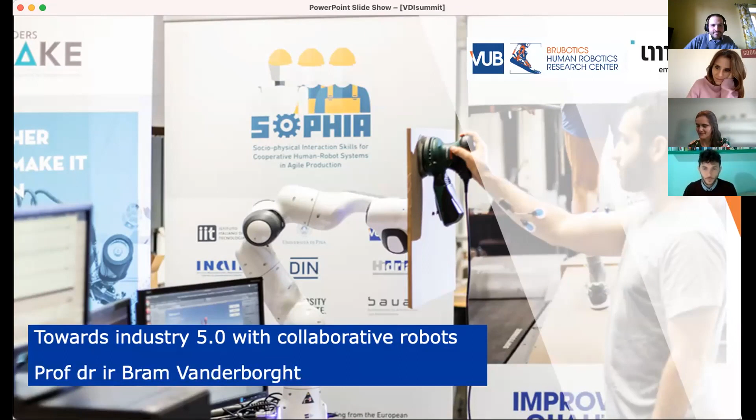So I will talk about towards Industry 5.0 with collaborative robots. The classical robots are used for the 3D jobs: dirty, dangerous, and difficult and dull. But some say that it will be also becoming a 4D story, where demographics becomes an important player.

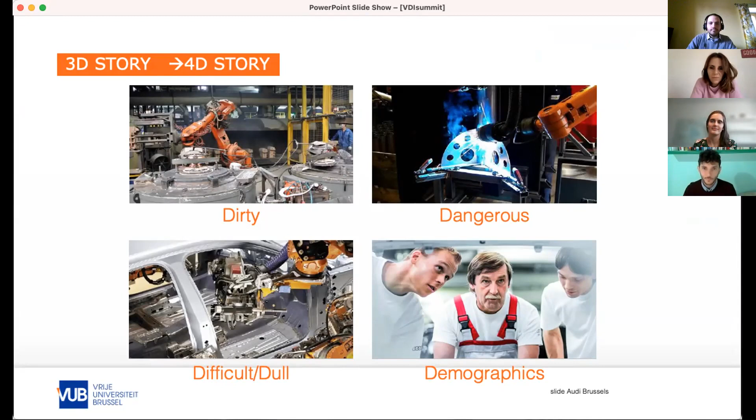We see that the average age is increasing. We need to work longer. And this is the case in Japan, but also China, due to their one-child policy, but also in other regions like Europe, this has become a serious problem.

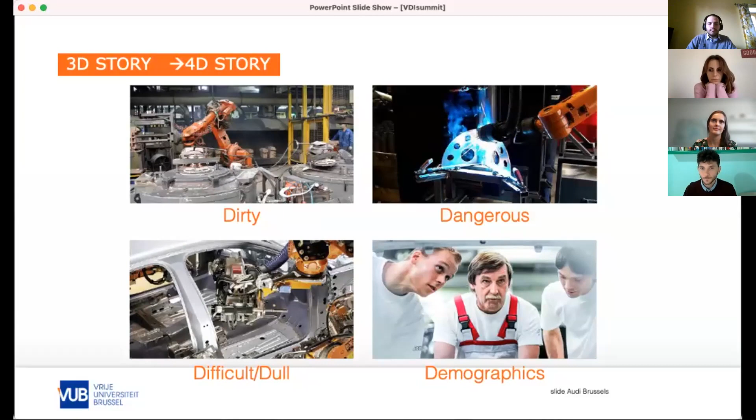Moreover, the complexity of manufacturing is increasing a lot, and typically robots are taught to manufacture cars, which is certainly a large part, but it's also not the complete story. You have a wide range of series, and as a customer, a wide range of possibilities. So every car is almost becoming unique.

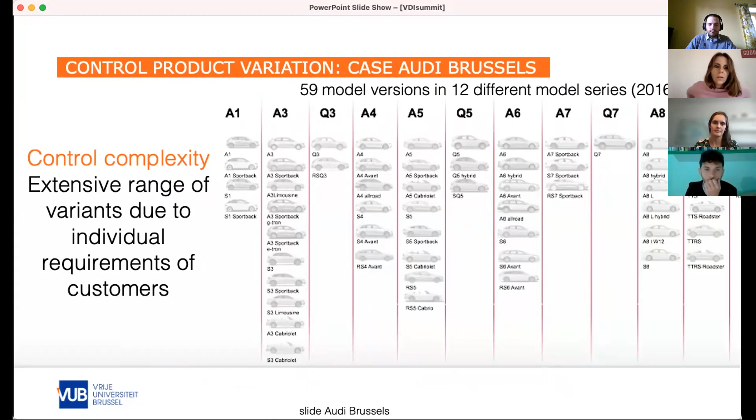In the beginning, when you have the body shop, you don't have a lot of variation. You have 3 doors, 5 doors, the paint also too dangerous. So there is a very high level of automatization, but in the end assembly, where all the different variations become flexible parts, we see that the level of variation increases, but the automatization dramatically decreases.

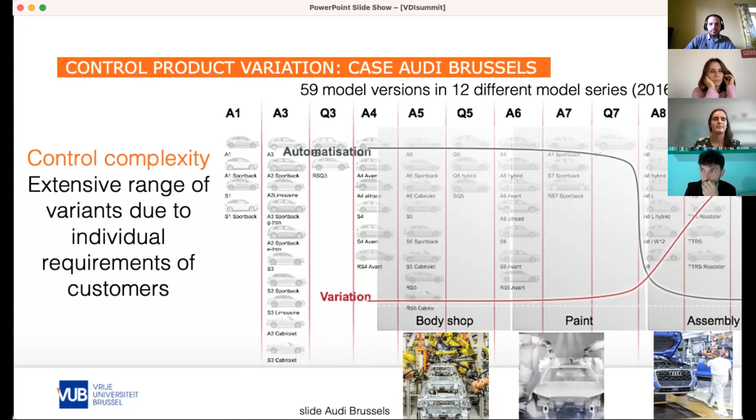For example, in Audi Brussels, at the moment when they were producing the A1, there were 5 robots active in the end assembly. All the other jobs were done by humans who have the cognitive load, but also have to work with their hands above their head, bend over in the car, which causes musculoskeletal disorders. Elon Musk also expressed that they wanted to make it too automated and that humans are underrated.

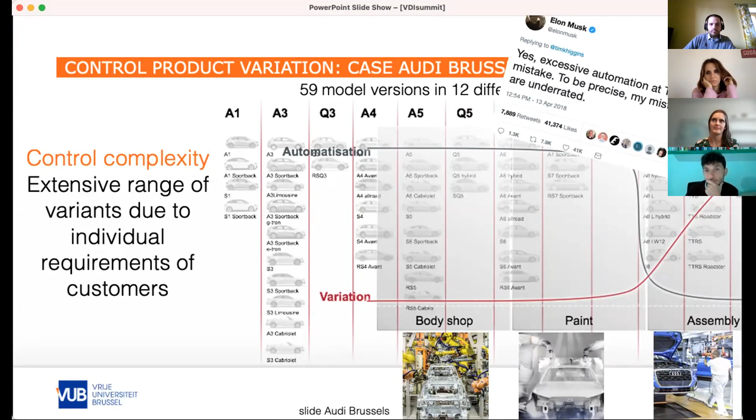But all this work in non-ergonomic conditions has a huge impact on the body with lower back pains and other pains, but it also has a huge economical impact. For example, in Belgium, it costs €1,000 a day for one person being absent. So if you have a few percentage of absenteeism on your work floor, that has a huge impact on the productivity of the plant as well.

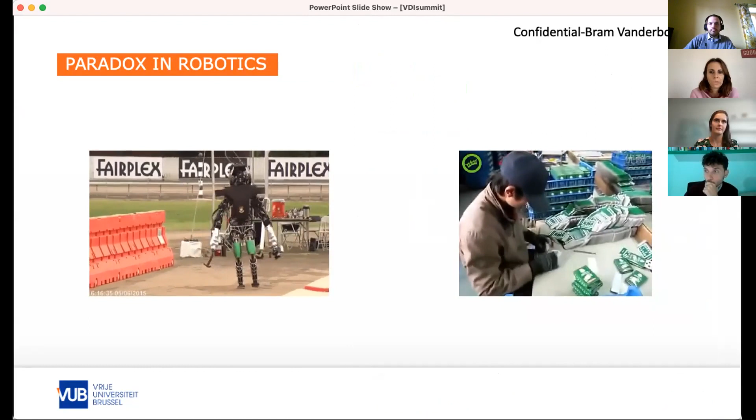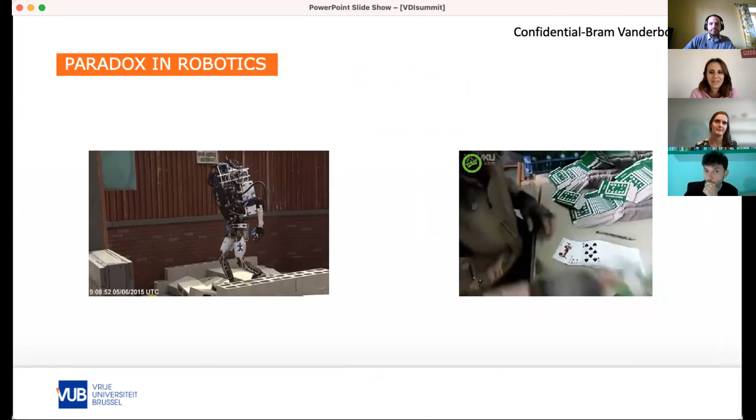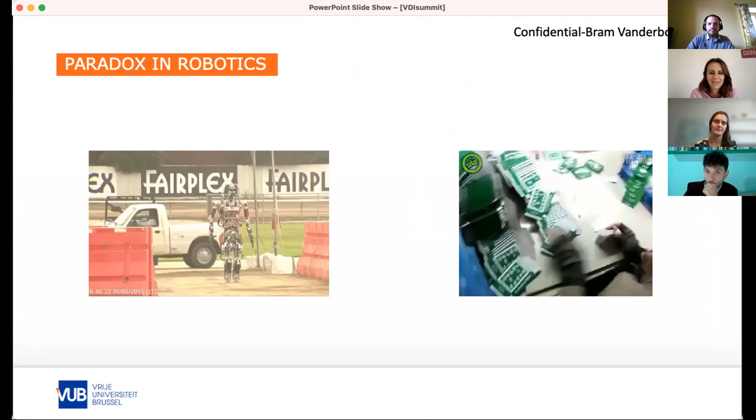So why then not use robots? But there is that famous paradox in robotics: often what is very challenging for robots is easy for humans, but also often what is challenging for humans, like working very precisely, doing always the same job without becoming tired, is rather easy for robots.

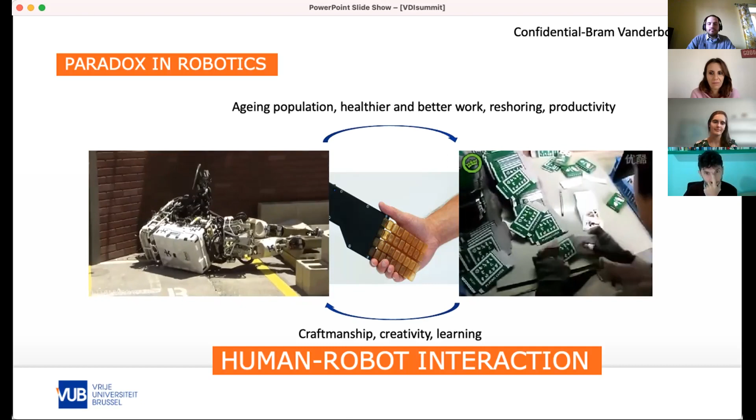That's why we focus a lot in our lab on human-robot interaction, to exploit the complementary strengths between humans and robots. And also, the human is for us still a huge source of inspiration to build better robots.

And so Industry 5.0 - in the past, objects were built for the elite at a very high price. And due to the several levels of industrial revolutions, we could produce mass products. For example, the famous Model T of Ford could be gotten in all colors as long as they were black.

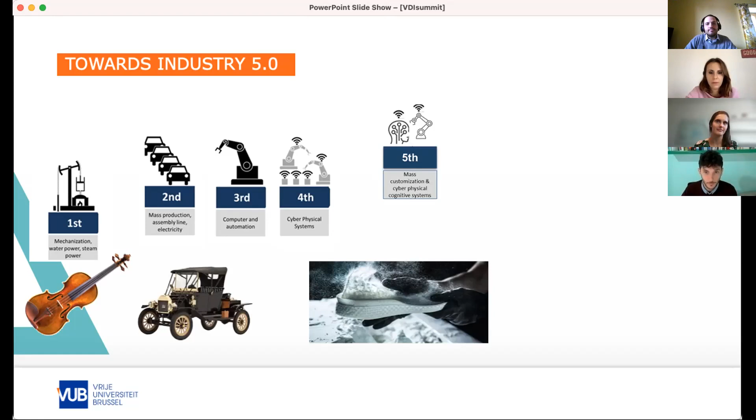But the idea of the fifth wave is to have mass customization. I, for example, run in the forest in the morning, someone else runs at lunch in the city center. We all have different feet. So how can we produce a shoe which is individualized for a certain person? That we cannot do with mass production, we need to do it locally, and to make it at the cost of mass production, but with the uniqueness of mass customization.

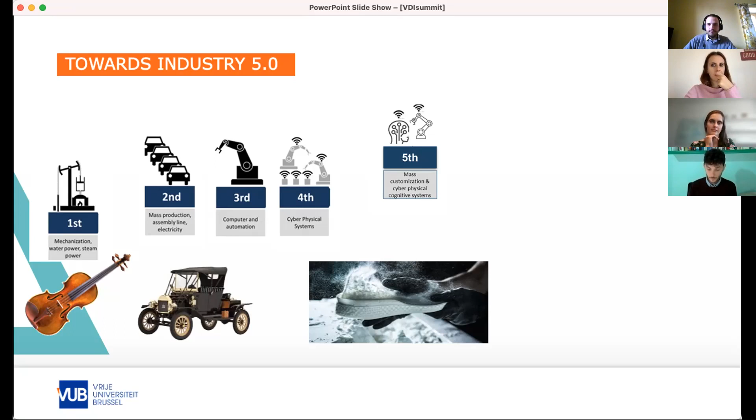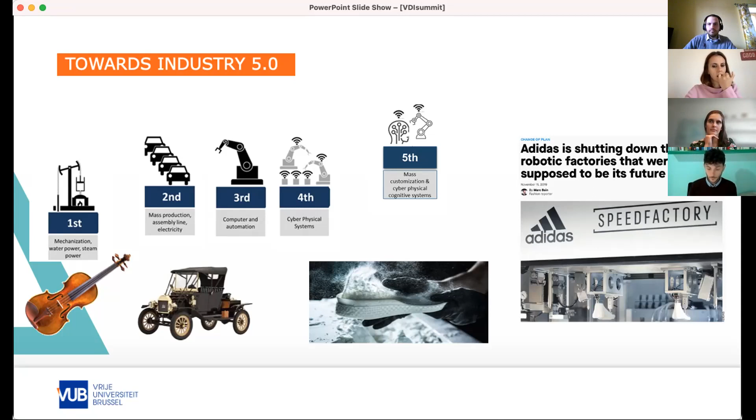So we need new technologies like robots or others like 3D printing in order to realize this vision. For example, Adidas developed its first factory outside China back in Germany, the mother country, but they also had to close it again, probably because the technology was not ready.

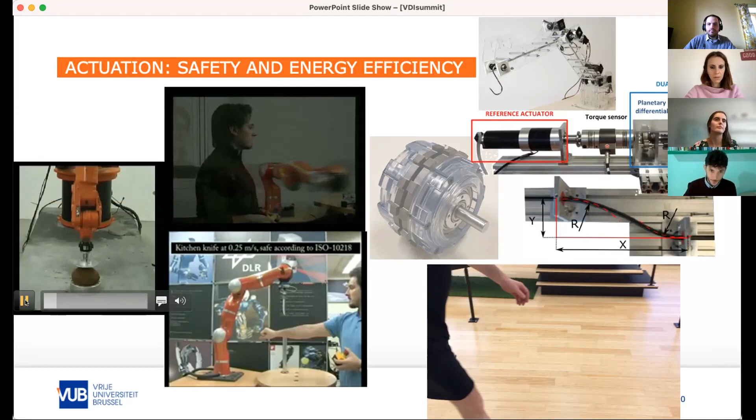As mentioned in the introduction, safety is of course the primary concern if we want robots to be working together with humans. Here you see the classical industrial robots crushing a coconut, a video from DLR, because it's too unsafe, and that's also the reason why those robots are kept in cages far away from humans.

So 15 years ago, I think, we started innovating this with a lot of projects like VIACTORS and others, developing robots that are not position controlled, but torque controlled, and which have the possibility to interact safely with humans.

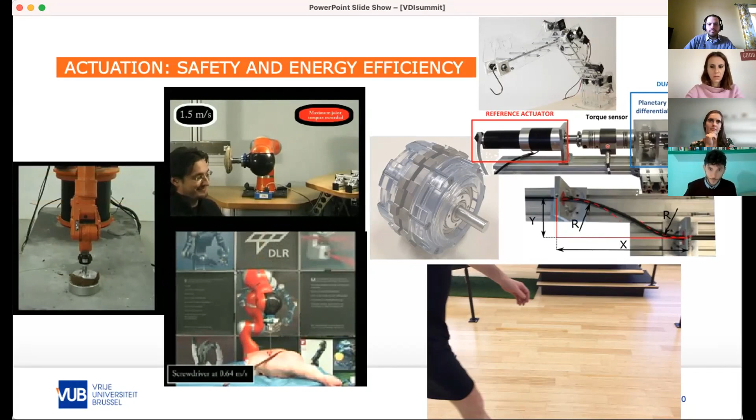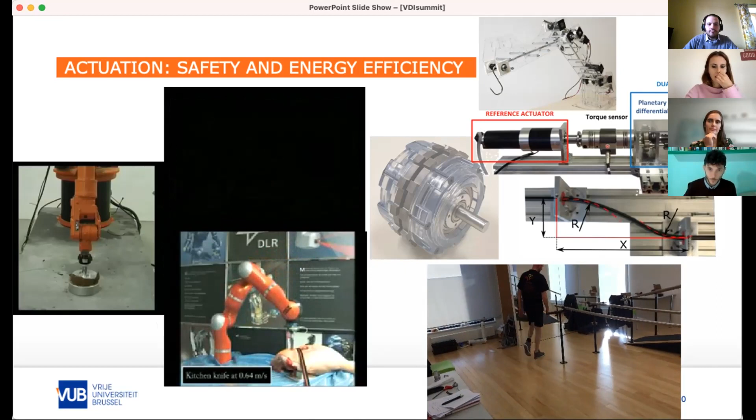In our lab we focused a lot on having compliance not by active torque control, but by incorporating elastic elements in the parts, so it's not only safe but also energy efficient. For example, we developed this for our prosthetic feet, which is now a spin-off company, Axiles Bionics. We introduced springs in parallel and in series, and we're further investigating how to make robot designs safer, lighter, and more energy efficient so they can also be mounted on ground vehicles.

For example, we introduced, as part of the work of Kelly, flexible limbs, so we don't design robots based on stiffness anymore, but on strength. This let us reduce the mass, which also improves safety.

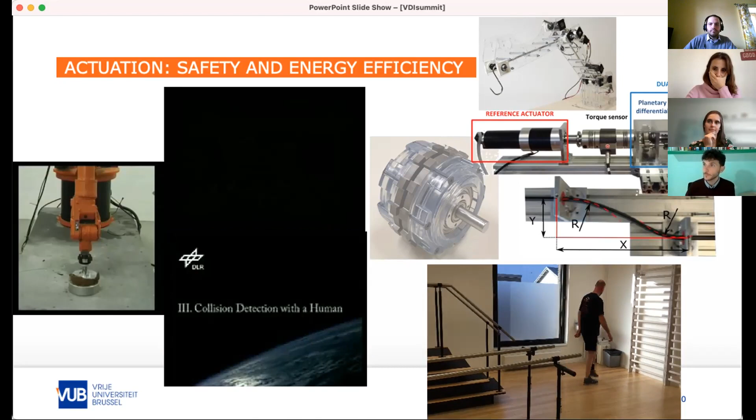We're innovating on new gearboxes, which is patented technology. We also want to spin off a company there to make gearboxes much more energy efficient, because we see a lot of energy is lost there.

We are investigating remote actuation, so the distal joints of the arms and of the exoskeletons are lighter and more energy efficient. We're also finding ways to add more motors so the overall system can become more energy efficient, a bit inspired by hybrid cars with a combustion engine and electric engine, but here we want the overall system to be more energy efficient.

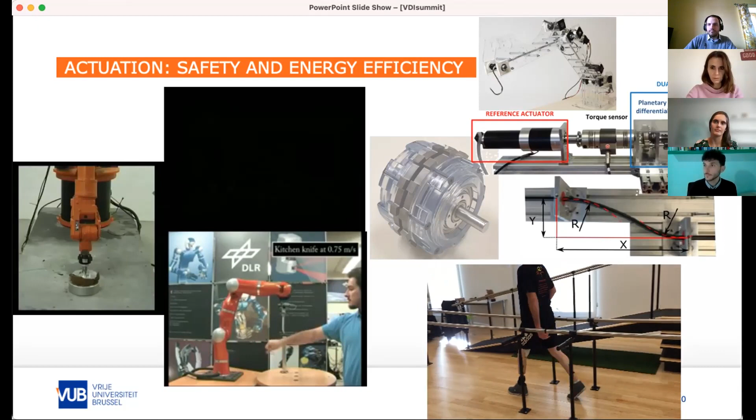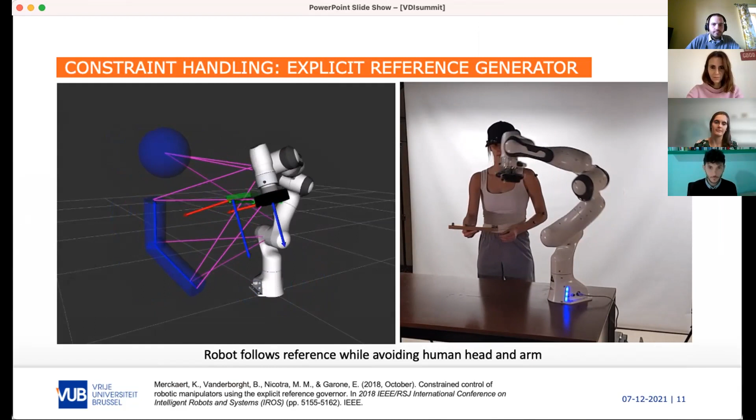So this is how to make hardware for improved human-robot collaboration. But of course we want to avoid robots hitting persons, and this is very nice work of Kelly, where we want to avoid a robot hitting a person while taking all the constraints into account.

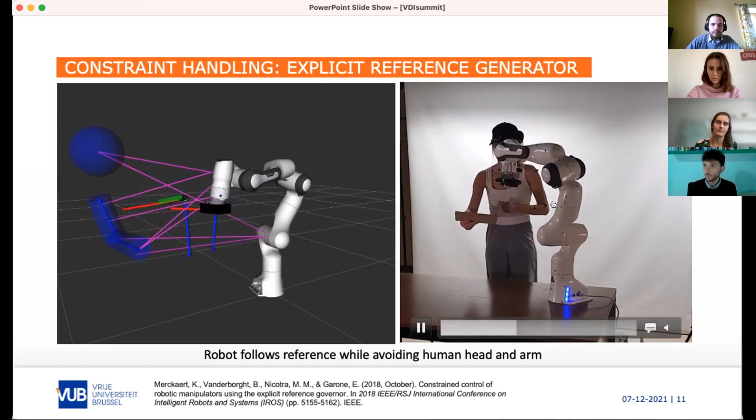Typically model predictive control is used there, but she developed, together with co-workers from Boulder University, an explicit reference governor which can be calculated in real time. Here you see she placed extra mass on the robot to push it toward the torque limits, but the constraints of torque and speed are still satisfied.

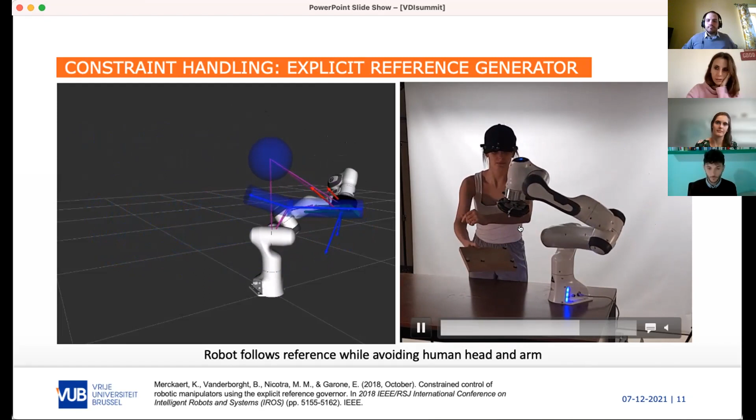She made the robot try to follow this plate at 30 centimeters on top, to show that it's real time. At the moment she's wearing a motion capture system to determine where she is compared to the robot, but of course this isn't practical in a real scenario. That's why she's now also using cameras, but that has limitations too.

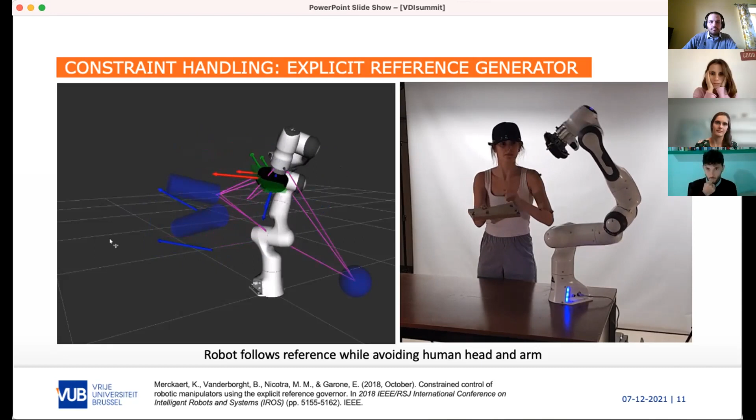That's why I recently also joined IMEC, a big research institute in Belgium on microelectronics, where we want to develop a new generation of sensors and skins for robots, so we don't need these external systems anymore but can embed sensing on the robot to detect obstacles. This sensing can be combined with the control that Kelly developed.

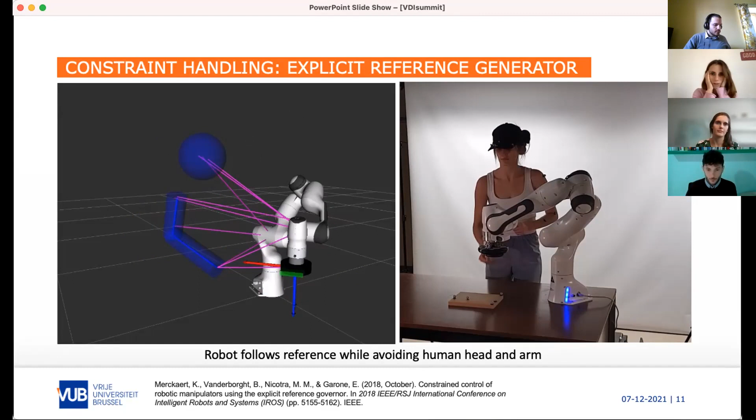At a certain moment, several years ago, Audi Brussels, at that time building the Audi A1, approached us. They saw the development of the cobots and wanted to test them on the manufacturing floor. But when we entered the floor, we saw that people got afraid of a new wave of robotization.

Our story was that we want to reduce your cognitive and physical load, we want robots that help you. That's why we very quickly brought sociologists into the project, to help us figure out how to build and program robots so they're accepted by the workers.

One of the features is that we started experimenting with gestures, so the worker can use gestures. In order for the robot to respond, there was also a face, but we have copyright issues with the artist who designed it, so I'm not allowed to show it anymore.

While people were very afraid of this new technology at the start, now they're really proud to work with the robot. It allowed a new wave of different cobots in the factory for very different applications. Now they're building the Audi e-tron electric vehicle. This was the only robot at first, but they later had 500 robots that got nicknames, showing it was really accepted by the workers. It was a whole new type of robot introduced there.

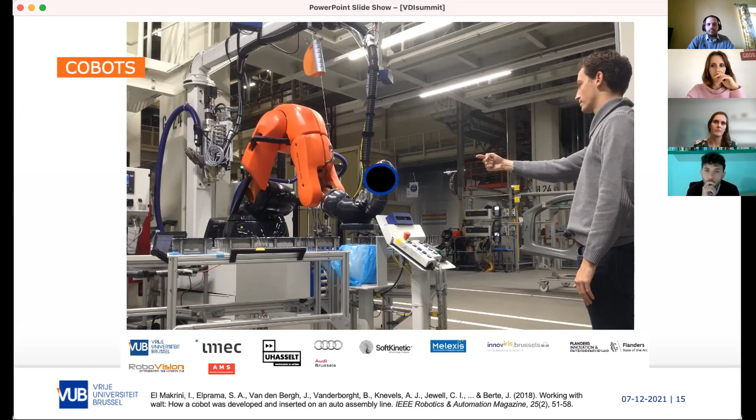This was the only robot allowed at that moment by the Metal and Wood Union in Germany, which Audi Brussels took over their rules. But we continued to work where we saw how humans and robots can work together.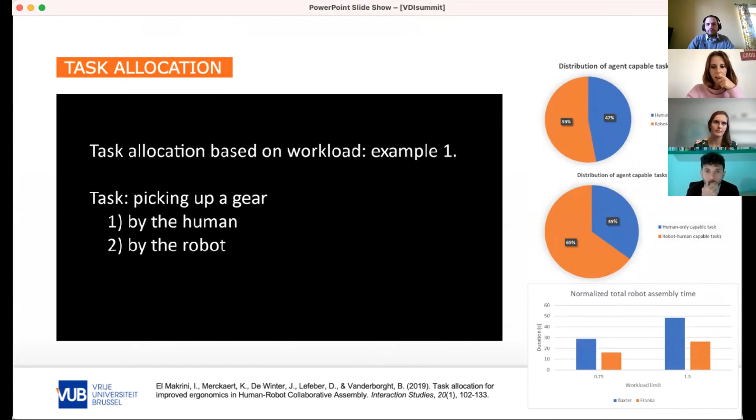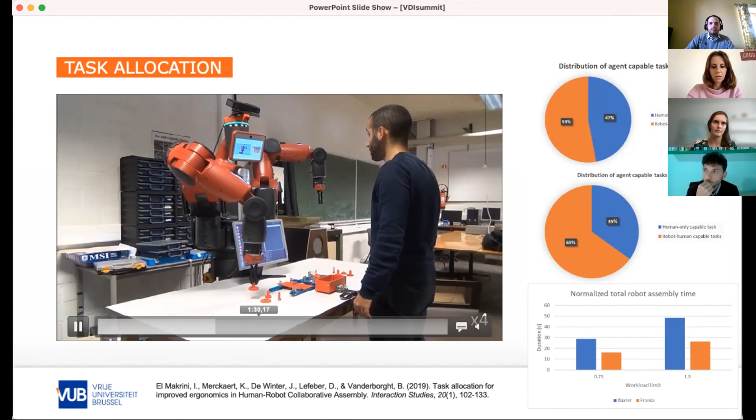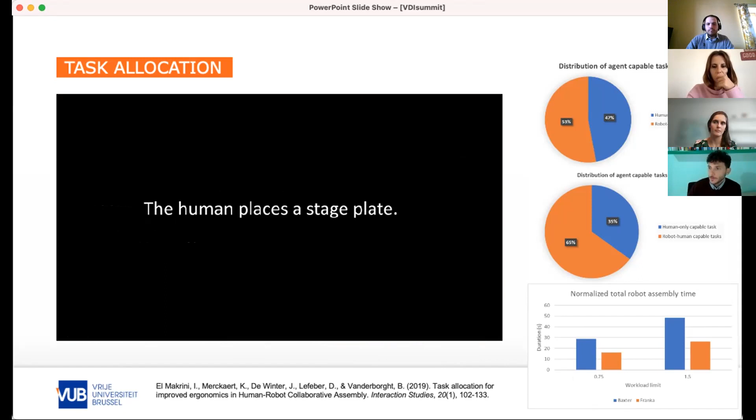This is, for example, task allocation, where we distribute tasks between a human and a robot, both having different capabilities, also the human having issues with ergonomics. So you see that we track the ergonomics of the worker and we distribute the work over the human and the robot. If we take another robot like Franka, who is much more precise but only has one arm, you see the system automatically adapts a new task allocation scheme in order to optimize the work.

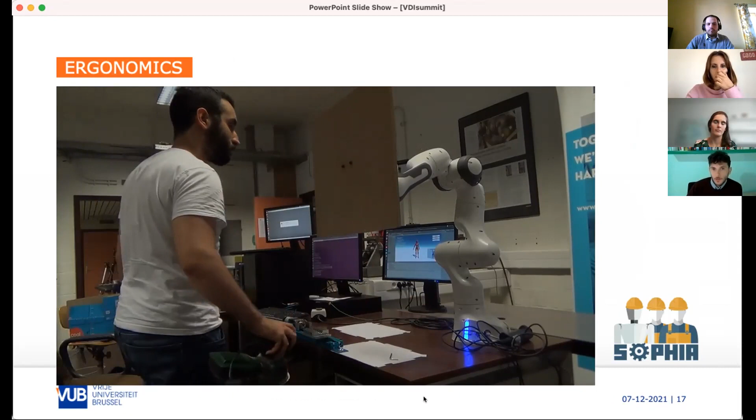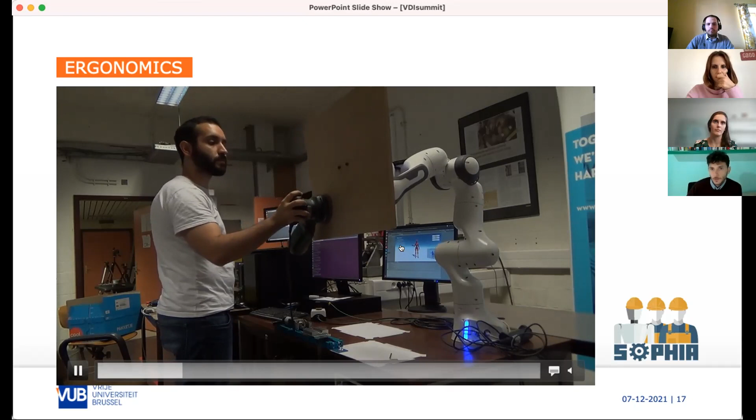Now we're also in a European project called Sophia, where also the idea is to improve ergonomics. And also here with the Kinect camera, we track the posture of the worker. If the worker goes to non-ergonomical postures, the screen becomes red and the robot adapts its behavior so that the human can always work in a more ergonomical place.

Apart from always collaborating with cobots, we also want to very intuitively program the robot new behaviors. I think Sylvain will go much more in depth there. The reason is that we want to go to much smaller batch sizes in manufacturing, but then it becomes very expensive to program the robot. And then it's better to still use humans for it.

So big companies like Audi Brussels can afford it, but what with small and medium-sized companies who don't have the programmers in-house to always reprogram, especially for small batch sizes. The problem is, of course, we have in this case a lot of models, the CAD models and so on, but not of how the assembly sequence should go.

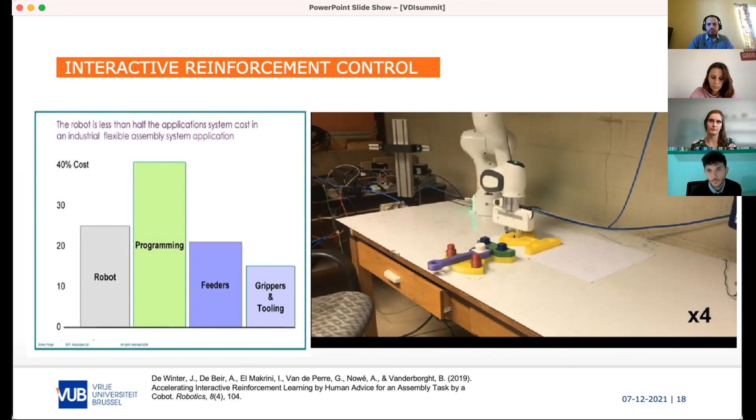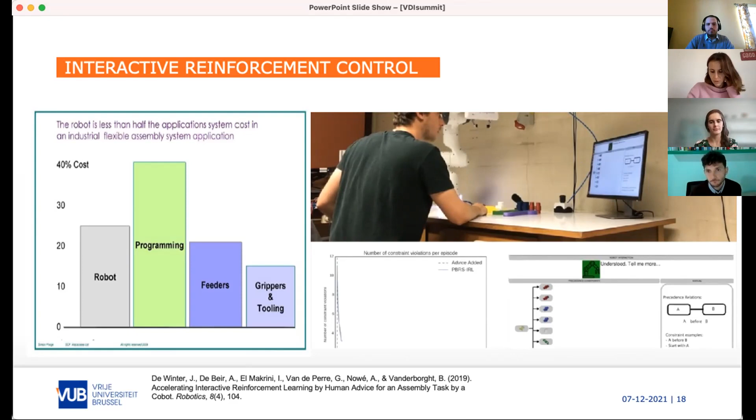Leaving that all to the robot, for example here we use reinforcement learning, needs so many iterations that it's not very practical to implement, especially for small batch sizes. That's why Joris is investigating how we can use interactive reinforcement learning, like a teacher-student relationship, to guide the robot to do the assembly sequence, so the robot learns in a much faster time.

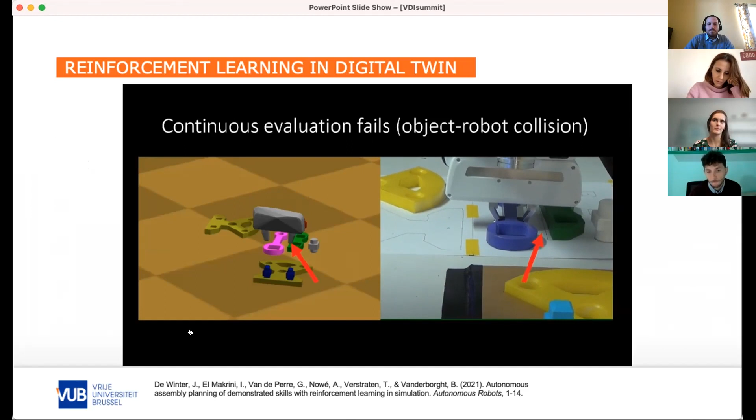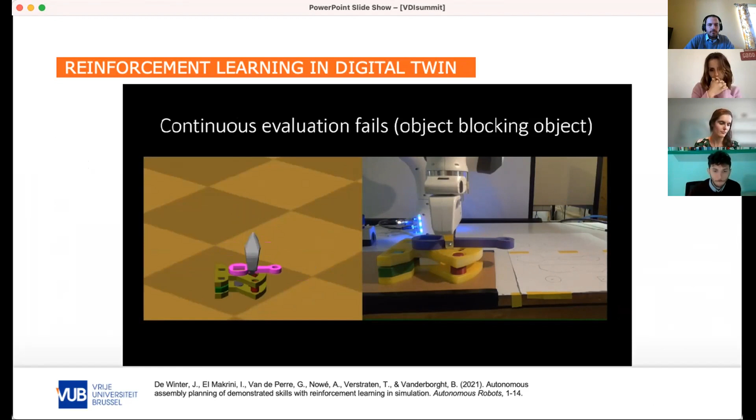Another approach Joris explores is to train in a digital twin, which is now a very fancy word for using simulators. One of the challenges is, of course, in an assembly sequence the physics become important. For example, here you see it's touching it, but also placing parts around it. That's why he had to use engines which included all the physics in order to have a realistic training of the device.

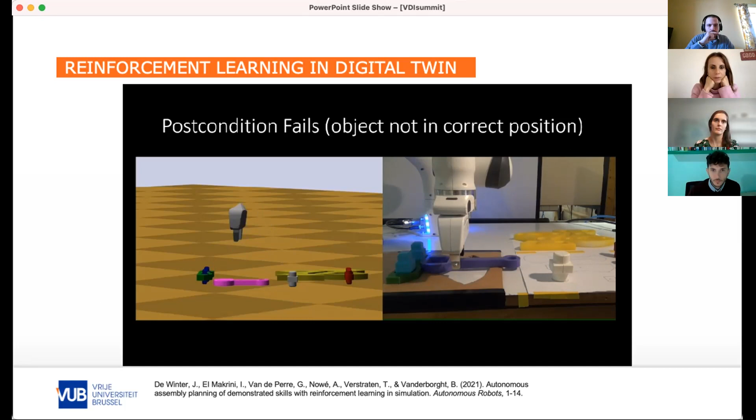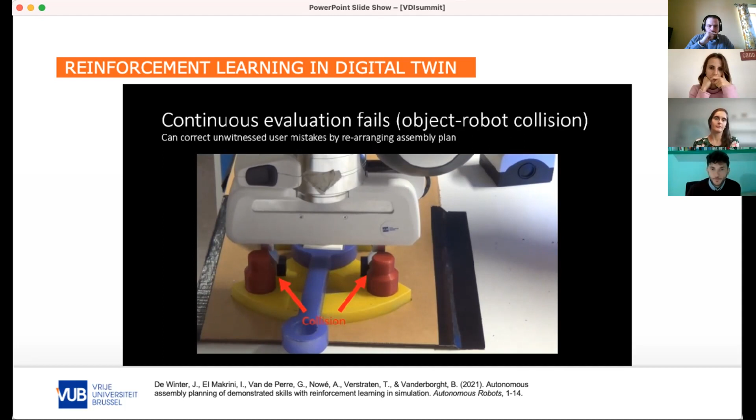So here we see different behaviors. On the right, it's only the video to show that the reality is quite equal with the physics. But what we do is we only train in the digital twin until we have a meaningful assembly sequence, avoiding all the errors. And then, of course, the simulator doesn't represent completely the reality, and we can still optimize in the real world.

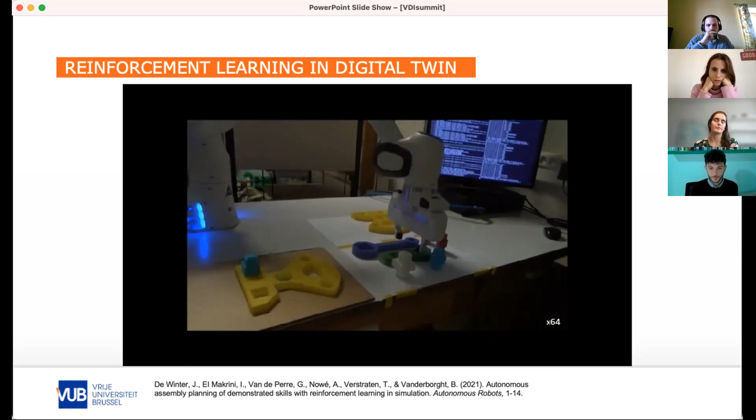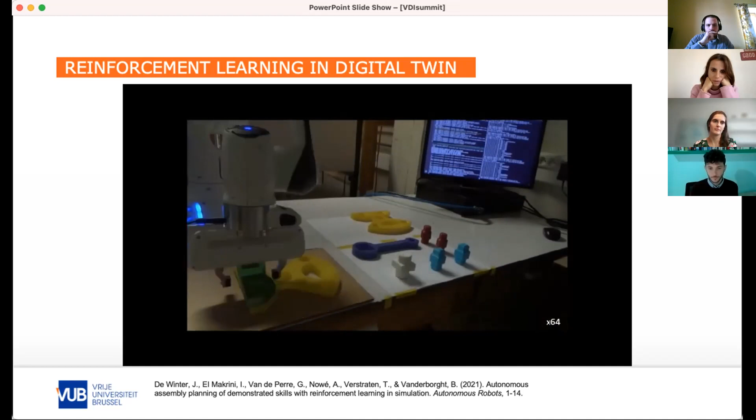Timings are not completely correct because we only simulate the end effector and not a complete robot, in order to make the simulations faster. But then it can do different assemblies, and we're still optimizing it to see how we can save time and be a bit more productive.

One thing is that we want flexible assembly, but we still see that robots have very limited capabilities. Of course, they're developing humanoids which can do a much richer amount of tasks, but those robots are very expensive. That's why Bryan Convens started to think, how can we use multiple agents with different capabilities that, for flexible assembly, very dynamically come together in order to get the work done.

So to start that research, he also uses the explicit reference governor as the base, but in a different distributed fashion. He started with small drones here, Crazyflies, also work performed at Boulder University, to make different agents all go to different tasks, to go to different positions. The idea is that every agent is individually safe, so you don't need any communication, and the individual agents all handle their own constraints.

One thing to say is they don't do it on the perception side. That's why you see on the outer place still the motion capture system. And again, that's the reason also why we joined imec, so other researchers are now working in the team to do the perception task.

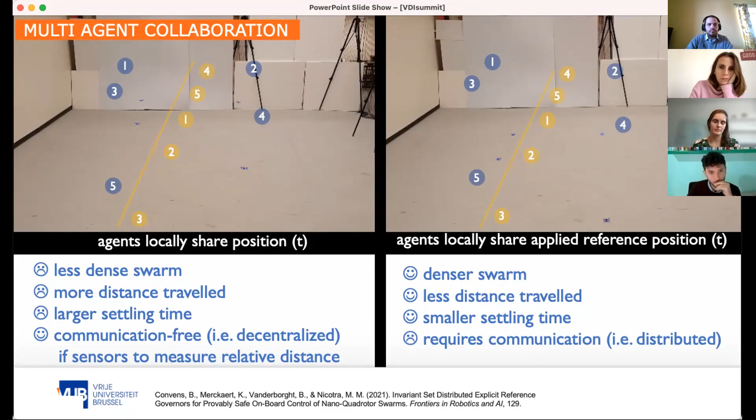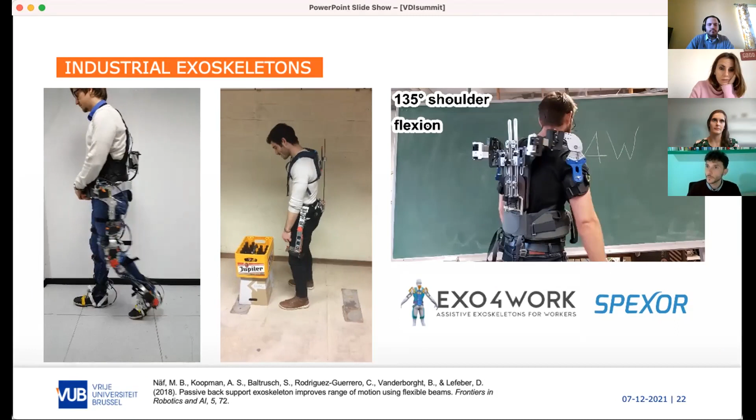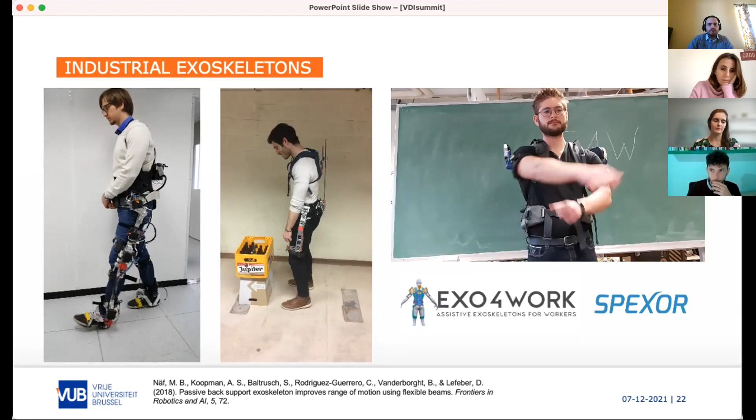One extreme of cobots is wearing the cobot, which is of course the wearable robots or exoskeletons. In our lab, we develop different exoskeletons where we implement strategies like locking mechanisms, parallel springs, and so on, in order to use very small motors and avoid very broad exoskeletons, because in a manufacturing plant you need to be able to navigate a cluttered environment, going through doors and so on. So the device cannot be bulky, you need to preserve the versatility of the human body.

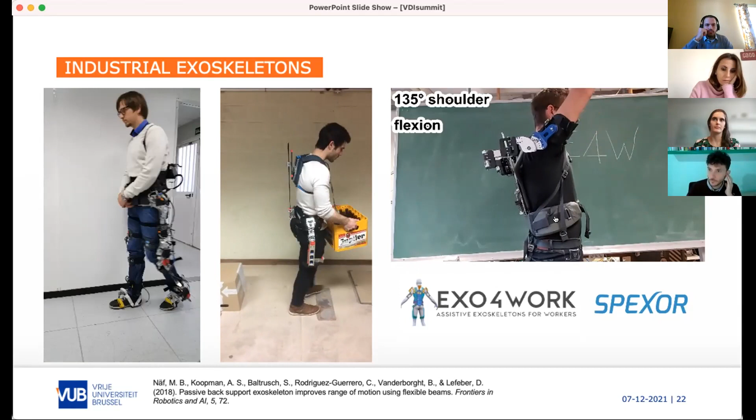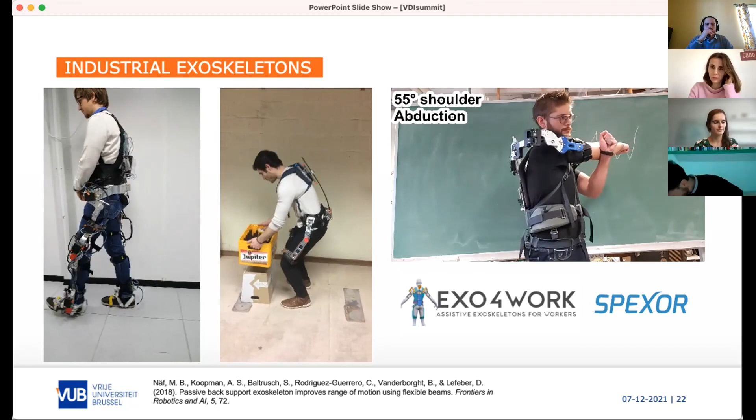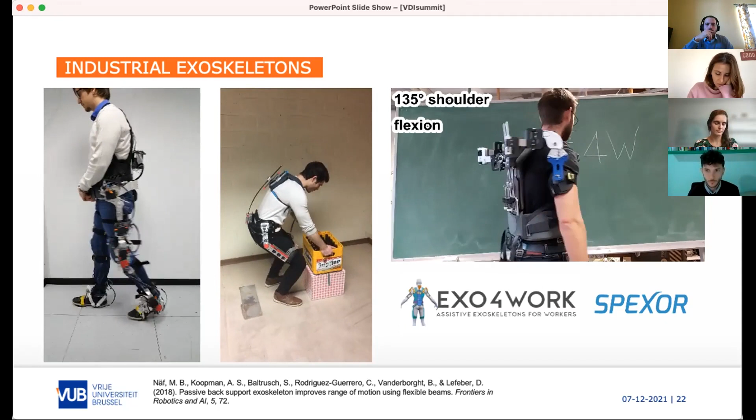For example, here you see exoskeletons for the upper limbs, for example to work under a car, while still having all the freedom to move the arms. We have patented solutions to handle the complexity of the shoulder, still having all the freedom to move while having assistance in certain motions. And here, it's not only a matter of technically developing the exoskeletons, but also investigating the impact of that technology on the human body.

We see a lot of exoskeletons appearing on the market, all claiming that they assist workers to do their job, but jobs come in a lot of diversity. Companies like DEME do dredging on the sea, so they have to change the teeth, which are very heavy. A car glass company changes car windows when they're broken. Warehouses like our supermarkets. So what our human physiologists do is go measure those motions at the workplace, reproduce them in the lab with physiological measurements - EMG, oxygen consumption, and so on - with different exoskeletons, to investigate which exoskeleton is most suited for a certain job.

Then sociologists come in to investigate whether workers are willing to wear the exoskeleton. For example, some exoskeletons put a lot of pressure on the chest, which is especially uncomfortable for women. With others, you need a long time to go to the toilet, while you have a limited break, so you don't have time to take it off and wear it again - the donning and doffing times are very long. Some also become very hot.

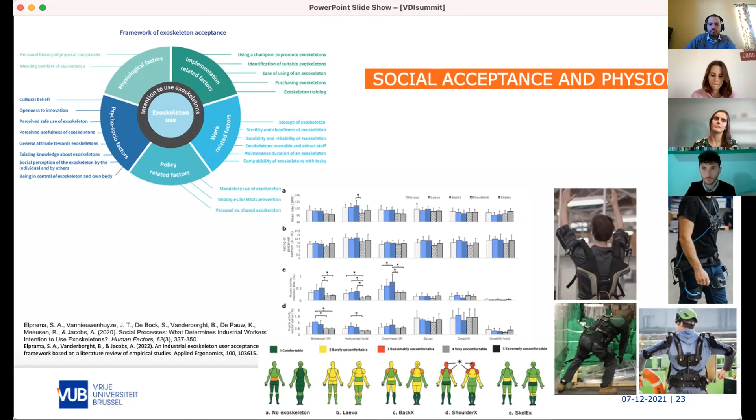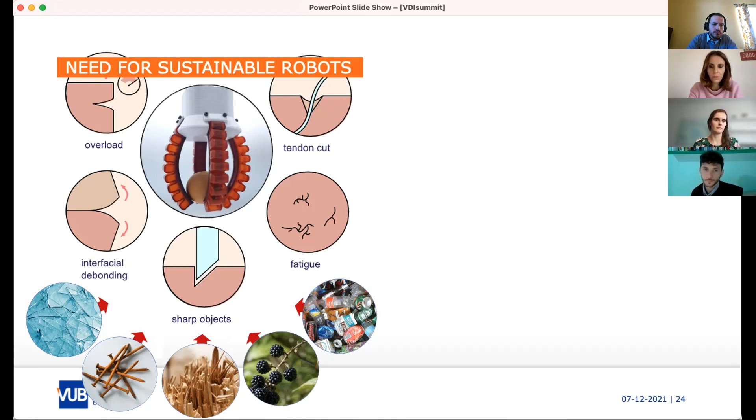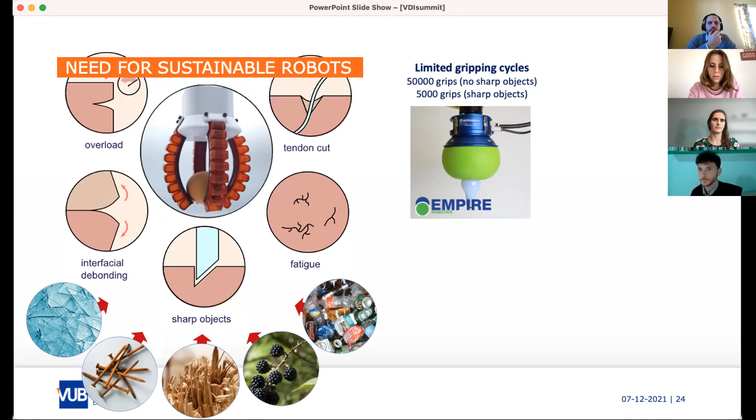One aspect is that we use a lot of soft materials, especially springs, in the design of our robots, for safety but also energy efficiency. One extreme is the use of complete soft materials, which gave rise to so-called soft robots, which we see becoming popular in manufacturing, but also for example in harvesting fruits, with soft grippers. But they come with a price - those materials are vulnerable to damage from sharp objects, overloading, fatigue, and interfacial debonding. For example, the Empire Robotics gripper is very nice and can grasp a wide variety of objects, which you often need in manufacturing, but after 50,000 grips, sometimes even only 5,000 grips, that gripper is broken and you need to replace it, leading to costly repairs or a huge waste stream.

Europe introduced the European Green Deal and even the right to repair, which is also why Apple now has kits to be ahead of that legislation, so you're able to repair your own iPhone. But I doubt we will all be able to repair such very complex products.

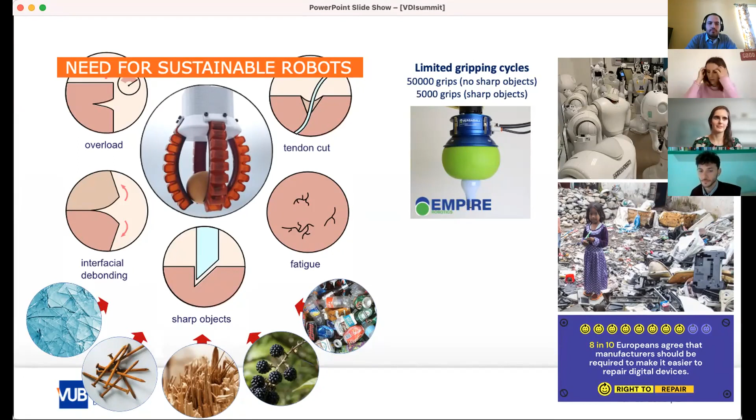Imagine a future where you don't need to repair your devices, but the system has the ability itself to repair itself, a bit like how we're able to repair wounds and fractures. We're not over-dimensioned - if we have an exceptional load, we get damaged, but we can repair ourselves. That's exactly why we work together with material scientists to develop self-healing robots. There is a wide variety of self-healing materials, but often the faster they heal, the weaker the material is, because they have weaker chemical bonds.

We use a certain Diels-Alder bond, which is a very strong material. We can give the material very rich properties, from making it very stiff to very elastic. We can make it conductive, so we can embed sensors in it, or even heating elements. And here you see that we were able—this is patented material—to heal wounds in seconds.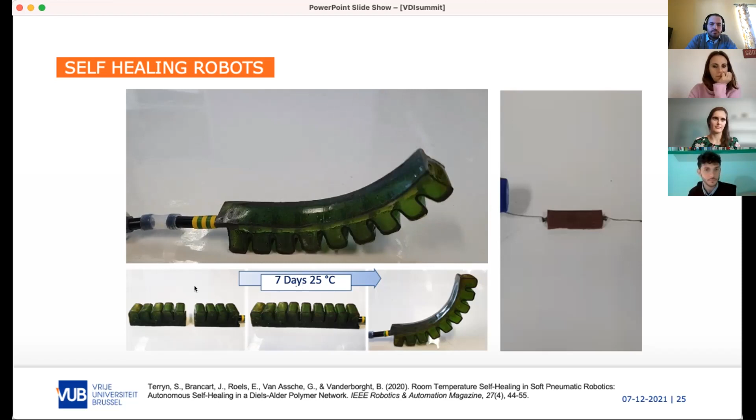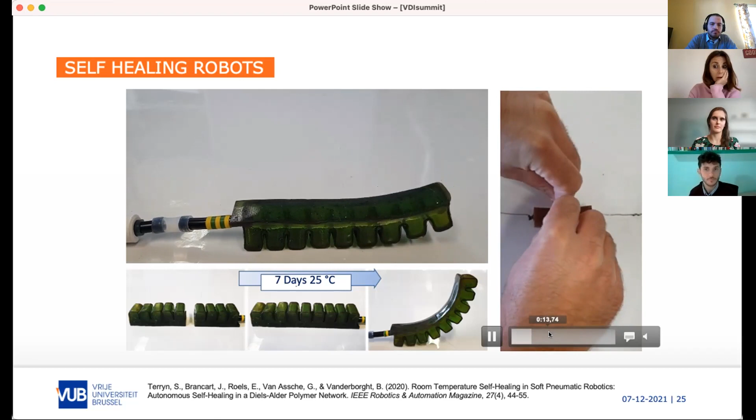Of course, here the stresses on the material are not very big. If we do more severe damage, then it takes for this material 7 days to heal completely. But even now we're further pushing the limits. So here you see we damage a material, we connect it again, and after a few seconds, the material is strong enough to lift up a bottle.

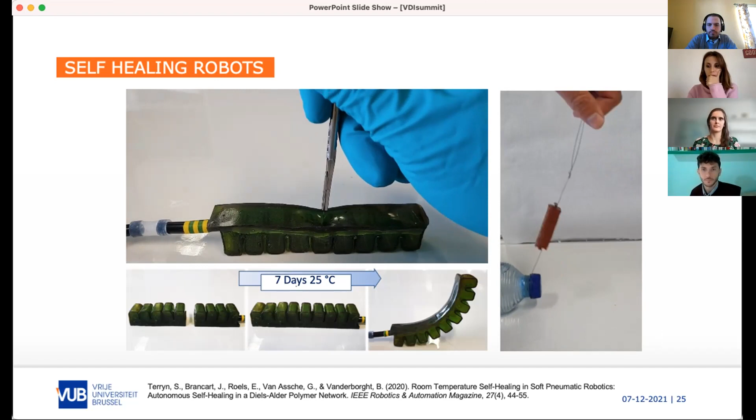So one of the things, thanks to the multidisciplinary collaboration between different parts—I'm sorry, I forgot a slide. I think it's very important to think of more sustainable robots, and sustainability in our material is over different cycles. First of all, if there is damage, we can extend the lifetime by self-healing and reusing it.

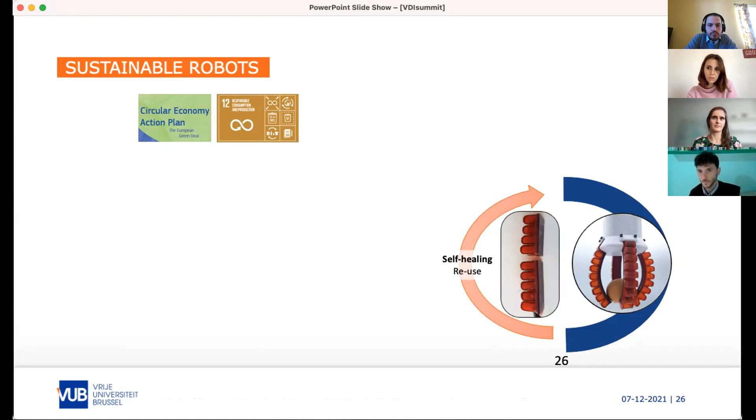If the system is not needed anymore, or has too serious damage, in contrast to the human body we cannot grow material, so then we can recycle the material, either mechanically—so we can print, for example, but we can also do molding and extrusion and so on—into other fingers, for example, or for a complete other purpose with the same material.

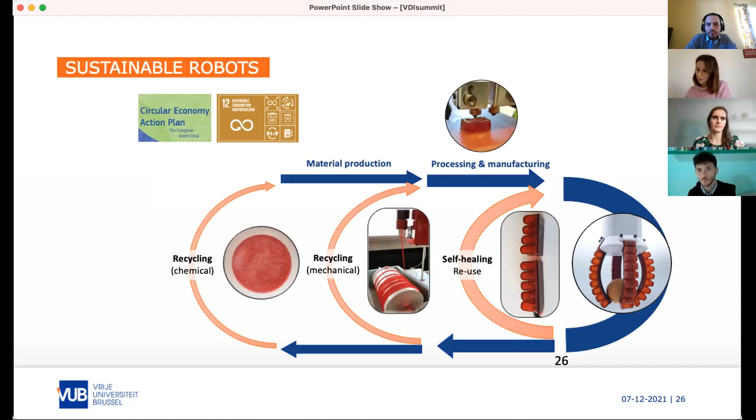We can also recycle it chemically. That means we can, at that moment, make different material properties out of it, more stiff material or more elastic material.

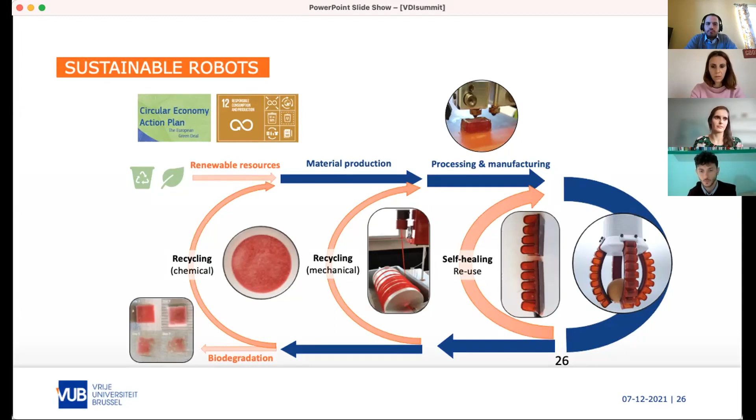Moreover, we're looking at whether we can use renewable resources, biomaterials. Anyway, material will get lost in the environment, so that's why we're investigating biodegradation of the material, so if we lose material, it doesn't hurt our environment. And thanks to the multidisciplinary collaboration, we can innovate.

We have to round up. Yeah, I'm almost done, so okay, we do—perfect—the complete value chain, from materials, to production, to sensors, to building the soft robots.

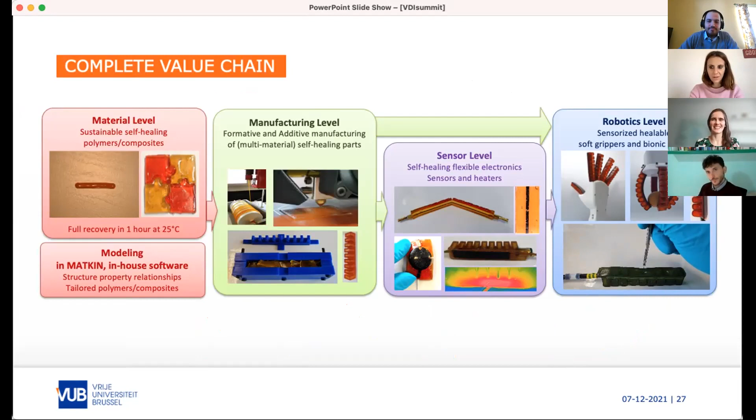And this is thanks to a very big team. It's not my work, but the work of a lot of disciplines—not only engineering, the AI group, the electronics group, but also the human, medical, and social sciences.